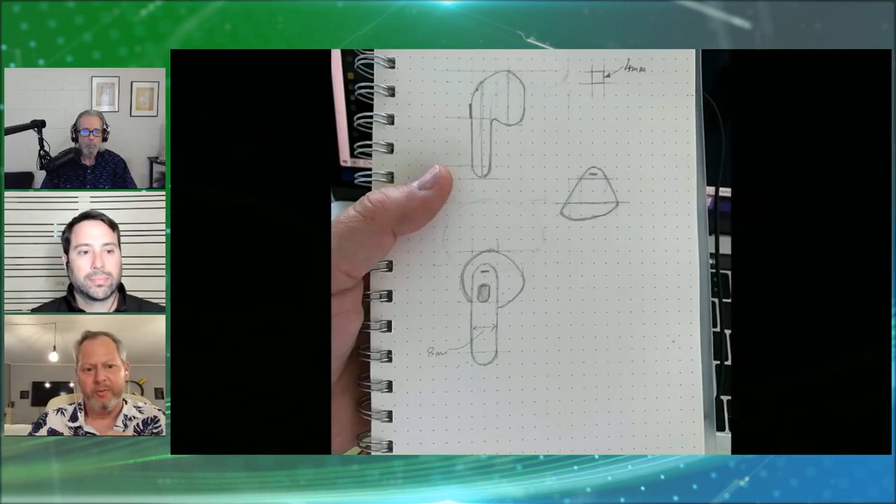So Stephanos, let's go ahead and take a look at the video. I understand you're going to describe the process for us here. Right. So this is a simple example that starts completely from scratch. I thought, well, how about designing a set of wireless earbuds? I designed them on paper with pencil, and then I brought these sketches into Onshape. And then we launched Phi, which, as you see, is in a tab within Onshape.

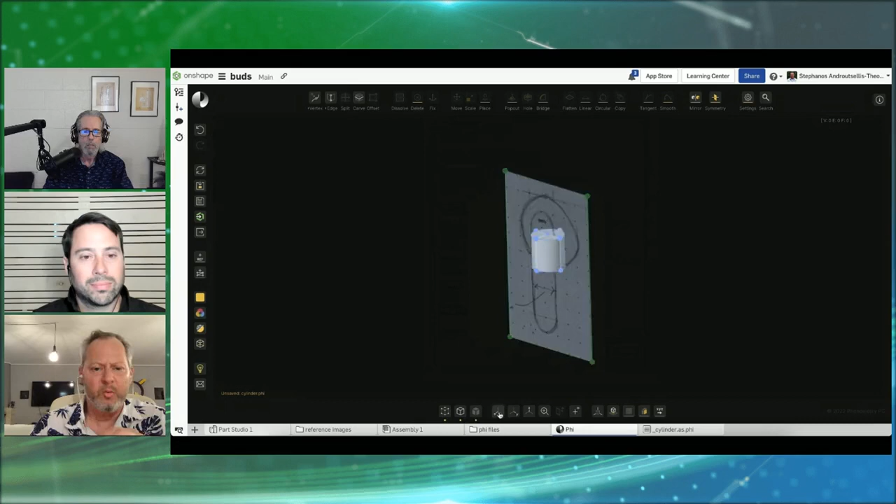And I started with a simple cylinder, which would be part of the stem, the main body of these earbuds. And then I load all these reference sketches. You can load as many as you want, and then position them, rotate them, do anything you want with them. And I shift my cylinder in place, roughly where I would like to start designing. By the way, I'm not a designer by profession, so this is just a quick example.

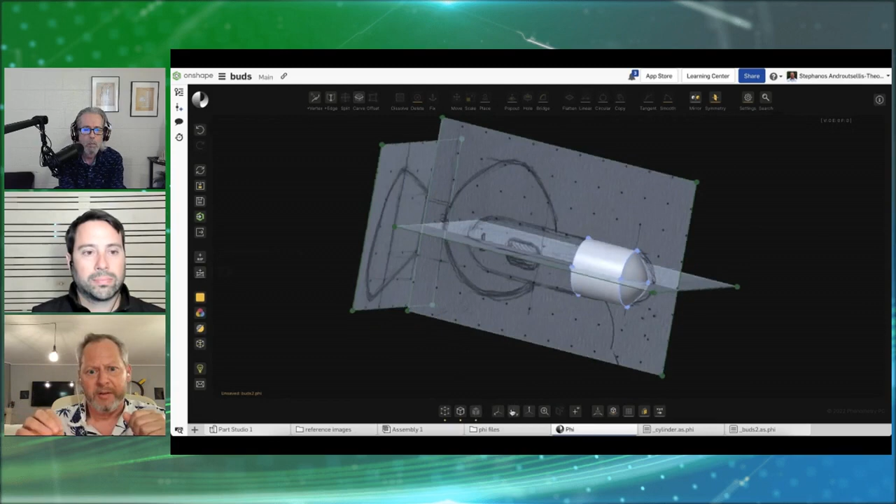And then I think, okay, how about starting from the lower part? So first I squeeze this cylinder because I see that it's not actually a cylindrical shape that I'm after. It's more like an oval section, as you can see there. And then I simply pull out this vertex to give it this rounded shape at the bottom. I pull it a little further out. It's very push and pull kind of thing.

And then I use a tool that we call Smooth, where you create edges, chains of edges, you select them, and then you ask the system to smoothen everything together to give it a fair and rounded shape.

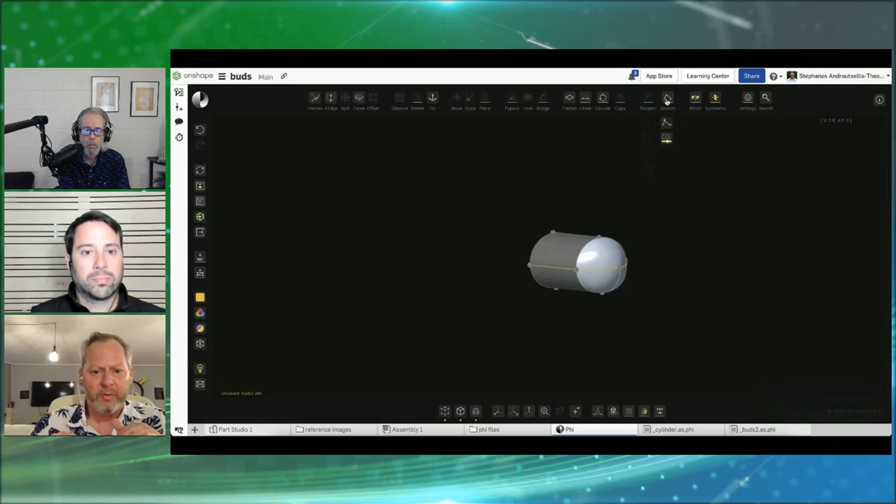And usually with just a couple of clicks, you can get to the shape you're after, but you can also go in and do more elaborate or precise work. And then I move a little further up.

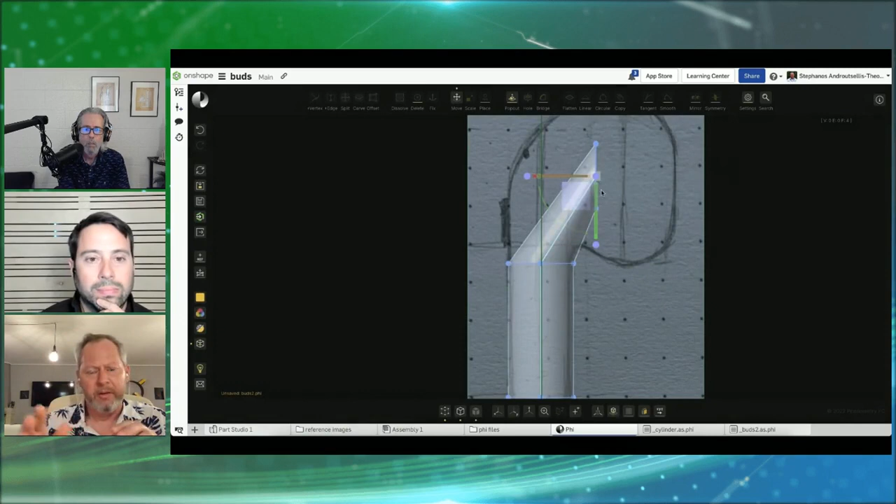I will simply elongate the cylinder all the way to the top, and then I do a pop out, which is kind of an extrude. So I create another little slice, which I can then move around, rotate. Here I use a precise rotation tool, and I place it roughly on that line.

I stretch it to give it the dimensions that I'm after. And then I rotate on the other view, and I also deform it like that. As you see, the surfaces organically constantly deform to accommodate the shapes that I try to give.

Here, I'm just flipping around this reference sketch. I brought it in the wrong orientation, but I thought that I could just show how you can place it again. And then I continue the design work.

So I select this front face, I pull it further down, and then from the front side, I will again select and pop out, do a little extrude of this face, as you saw there.

And then again, I will use this smoothening tool. So I will select all these triplets of edges, these small chains, as you see. And with just one click, I will ask Phi to deform and smoothen everything together.

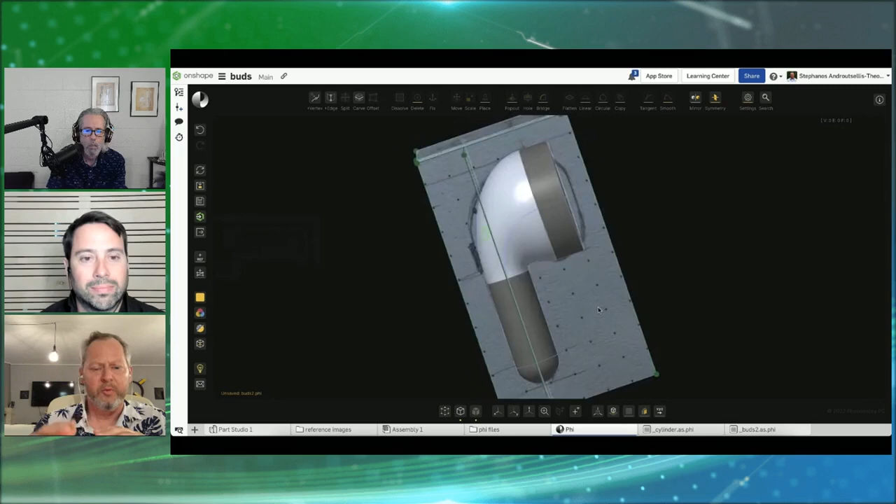So you see, immediately it gives me a shape that is quite close to what I'm after, because it's the most fair and smoothened shape that corresponds to these geometries.

Then from the front, I realize that I have a circular shape, which is not what I'm after. So simply by pulling out this little edge on one side, it all deforms to give me a shape that's closer to my design. I see a slight dip there because Phi now thinks that this is what I'm interested in, but just by adding a straight line, I can get rid of it.

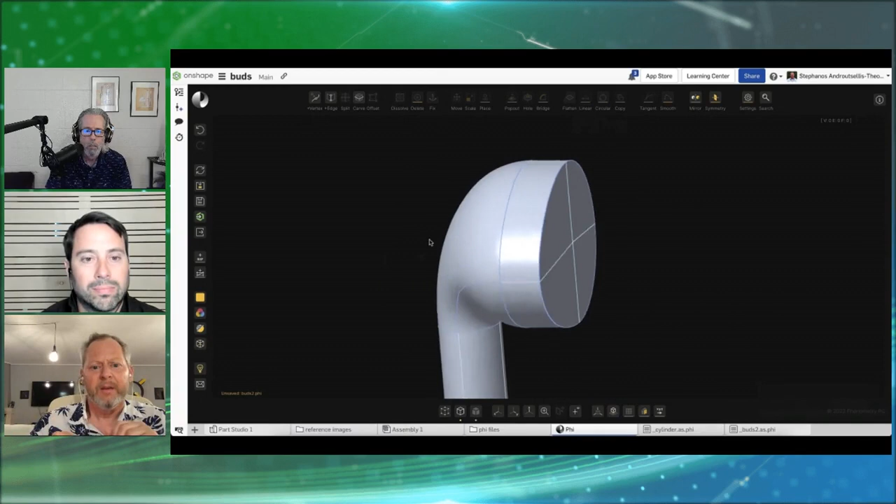And anyway, this will be fixed in a moment, as you will see. So at this point, we already have a shape that is pretty close to what we are after.

I go in the rear side and I simply pull out this edge and the surface is deformed to take that shape. And then I will finish off the front side by simply squeezing in the front side of this earbud. And then from the top view, I do a little more editing.

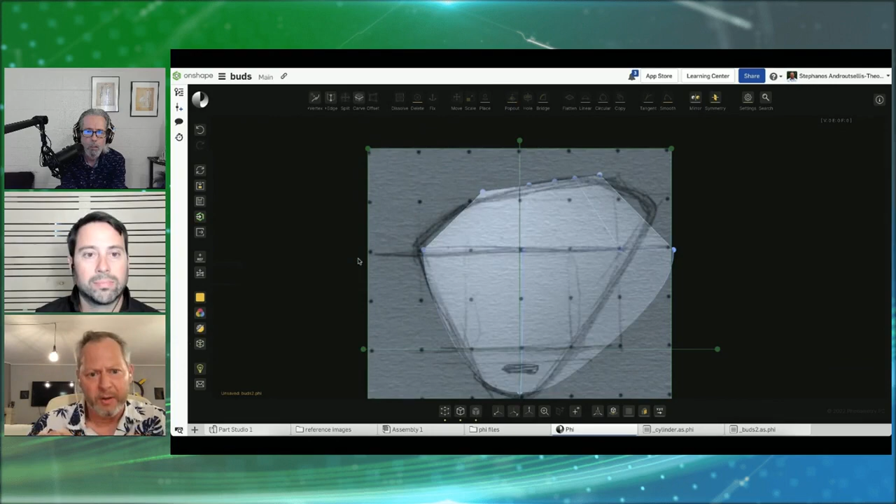So I'll push it back and I will tilt it and put it there in place roughly. Okay, we're not going for perfection here. This is just to give you an idea of how you can work with this tool pretty fast.

And then once more, the smoothen tool, I select these edges and I simply hit smoothen. But before that, I also set the smoothen strength. So this strength will allow me to get a more, let's say, strong result, a more rounded shape.

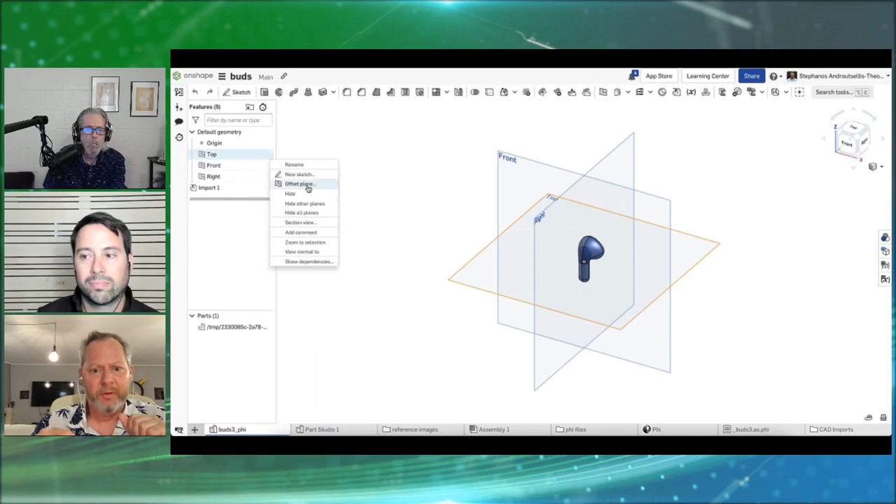And now simply with a click, I'm sending this over to Onshape, and there it is, translated into a Part Studio. So now all of the Onshape power is in my fingertips. I can add a fillet, as we were discussing earlier, and there it is.

And so if I decide that I want to do some further edits, like here I'm doing sort of an offset, and then I push in this surface to create a hole, roughly where the music will be coming out from, as you see there. So I do this little edit, and then I click send to Onshape once again, there on the left.

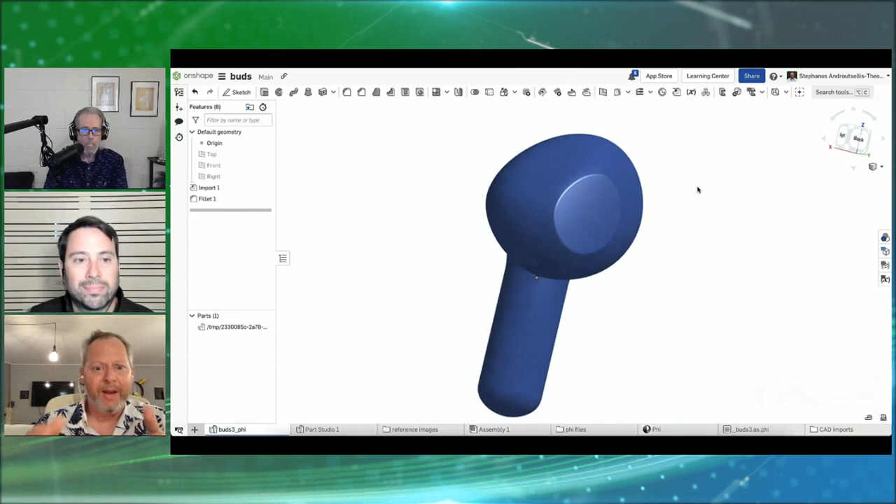And back in Onshape, after a few seconds, you will see a live update. So there you go. The shape has changed, but the fillet is still in place. So all of these downstream features are preserved, as we were discussing.

And now, simply using all of the Onshape capabilities, I do a mirror, then I do a shelling of these shapes, and with a section view, I can observe the surfaces from the outside, from the inside, until I'm happy that it's the result that I'm after.

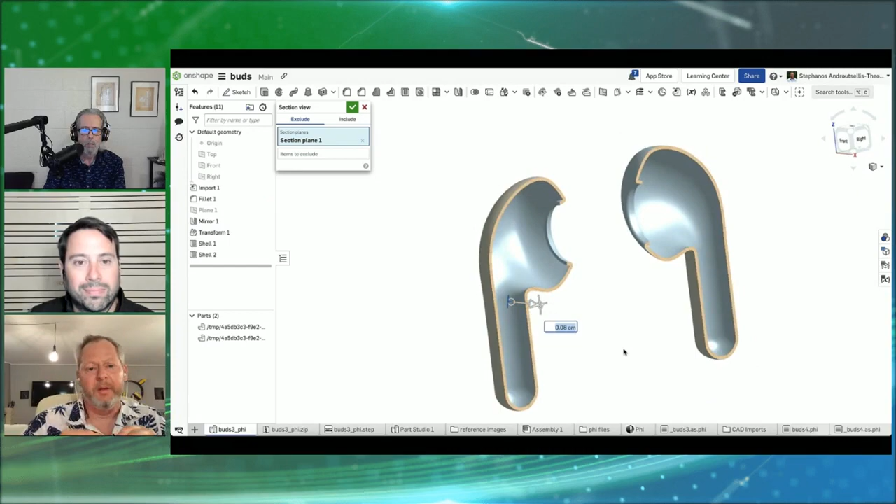And actually, we have a consultant who's a very experienced designer, and we asked him to have a go at further working on these earphones to get to a final product.

Yeah, so that's just to give you an idea of what it feels like to work with this tool. That's awesome.

That is really good stuff. Thank you. Fantastic demonstration. That was essentially real time, maybe sped up a little bit, but the fact that you could get all that done in whatever 5 minutes, 3 minutes that you used, that's incredible.

Yeah, we wanted to show that because often people, when they first have a look at Phi, they're a little unsure how to start. So I just wanted to go from zero all the way to the end.

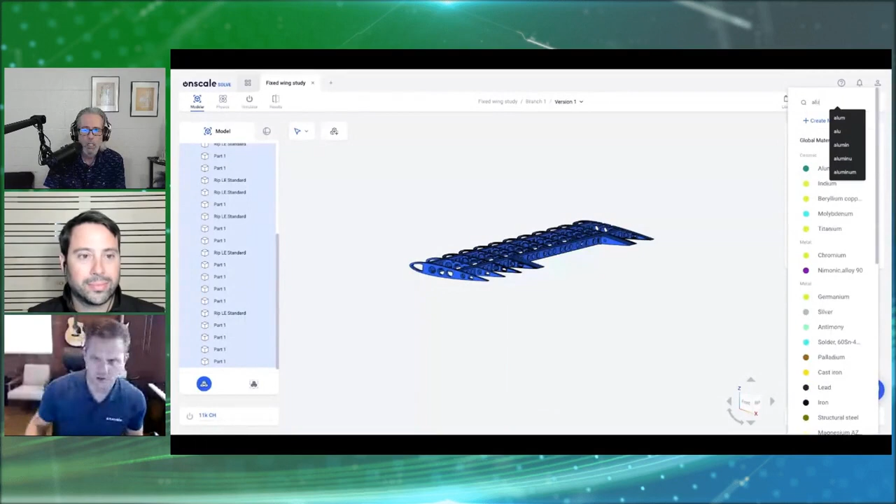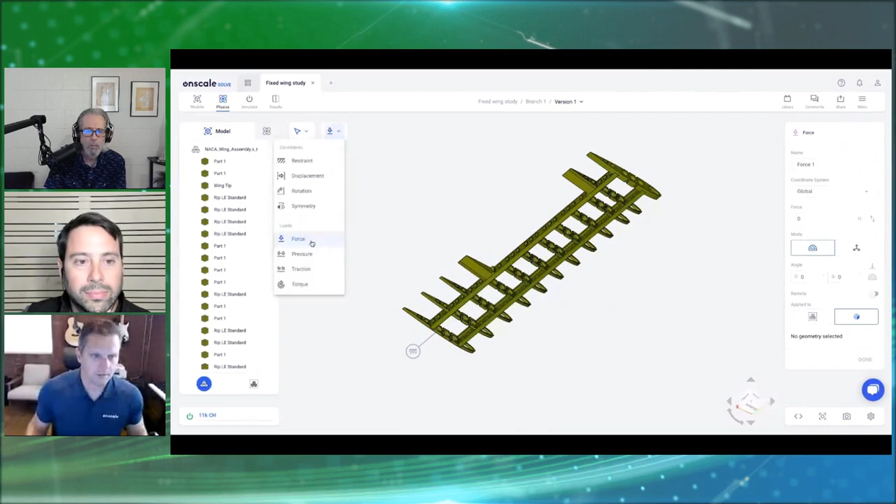First thing I'll show you is an aerospace application — I had to do that since I'm an aerospace engineer and now a pilot. This is a wing, you've got some ribs, some spars. You can see it's a pretty complex assembly with lots of different parts. We can easily set up simulation boundary conditions, like constraining one end of the wing, and put a pressure or force load on another part, 800 pascals. Some engineer probably figured out that was the wing loading for this particular wing.

And then we'll see what the simulation results in. By the way, we're generating a mesh here — this is all happening automatically. I didn't have to go in and put in a bunch of settings and tweak my mesh. That's always the hardest part about simulation, especially for younger engineers, figuring out the optimal mesh in terms of accuracy and runtime.

Now I'm going to show you how we can actually go into our scripting language. We took a cue from you guys — this is kind of like your FeatureScript, but we call it Sim API. I can put in a mathematical function here, so if I don't want a fixed value of pressure, I can make a pressure distribution that in this case is based on an elliptical distribution.

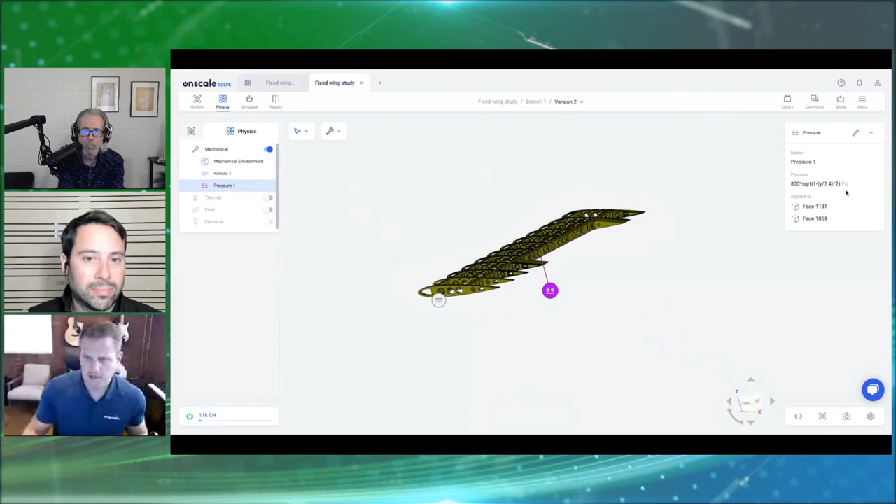We can run that simulation and look at the deformation. There you can see the mesh if you want to — it does a pretty good job of just meshing right out of the box without any tweaks, but if you want to tweak it, you can. You can get lots of engineering insights extremely quickly from that CAD assembly, which is created in Onshape.

Yeah, I can't imagine going through and trying to mesh that entire wing assembly. That would probably take a couple days, right, to get it all figured out properly. In some cases it'll be weeks. Yeah, I've heard that some companies actually employed analysts just to do the mesh for these things.

That's insane. Well, that's a great little introduction to OnScale, and thanks for— We got one more video. Oh yeah, we're not done. We're not done yet, Aaron. We've got another video we're going to show here.

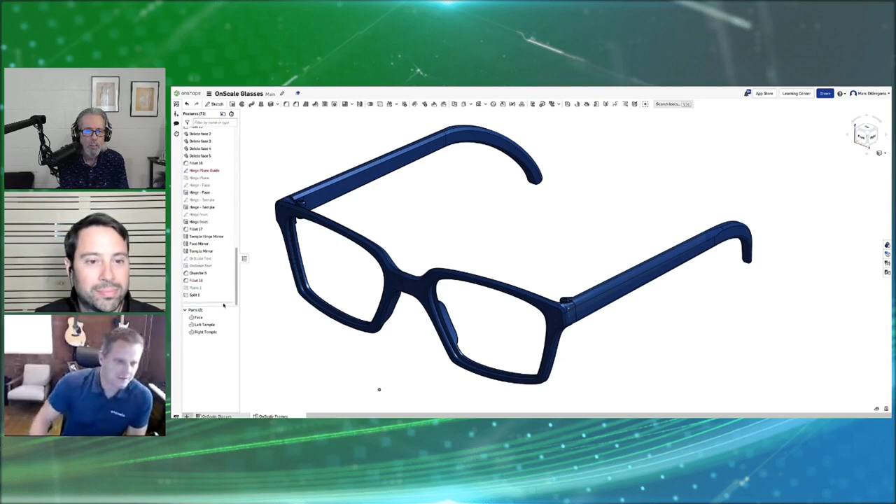So this is a pair of eyeglasses. You can see that this is an assembly with a couple of parts — fairly complex CAD model with lots of different features we've created. Most importantly, we'll show you how we've created the mates here. I'll go to the assembly view — I've already pulled in all my parts into the Onshape assembly and set up the mates and everything. We put some Revolute mates on the hinges, as you'd expect, so they actually work as you would expect real glasses to work.

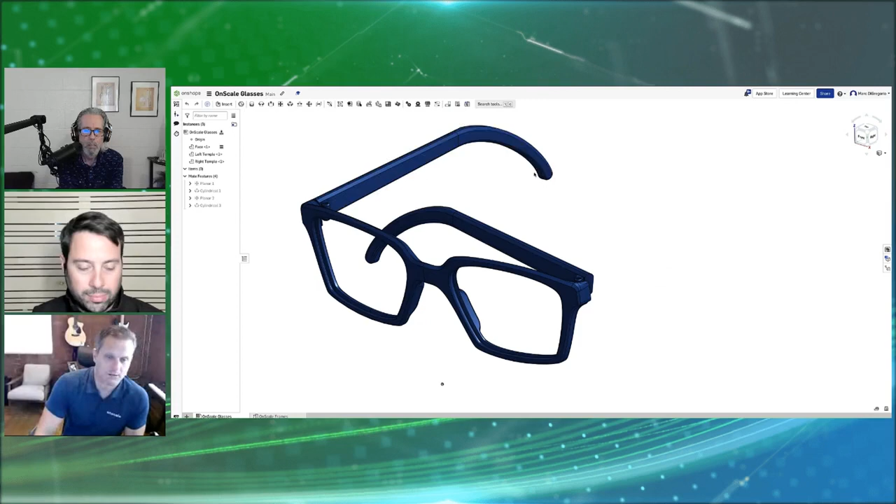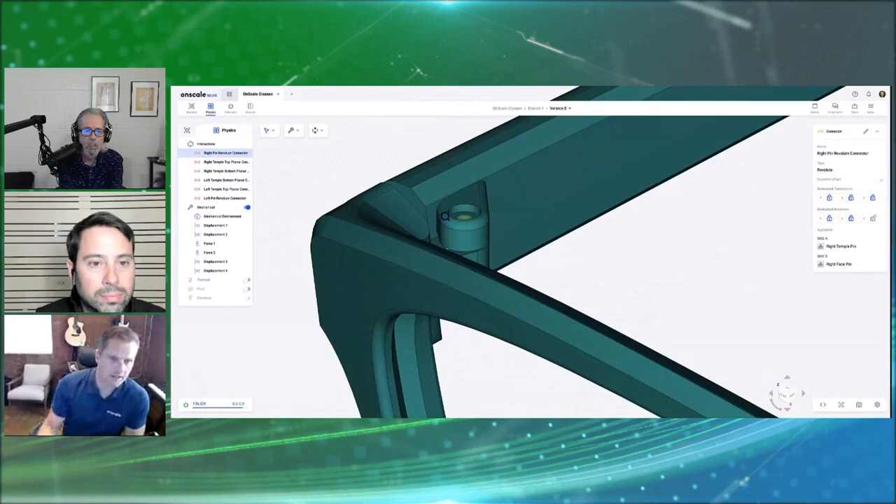We'll show that we import this into OnScale, and we'll actually detect those mates. Very soon we'll have the ability to automatically detect them; right now we can see them from the Onshape API. So I'm going to set them up in a manual fashion here, but we put in the same Revolute mates that you see in that Onshape model, and that'll mimic the physics.

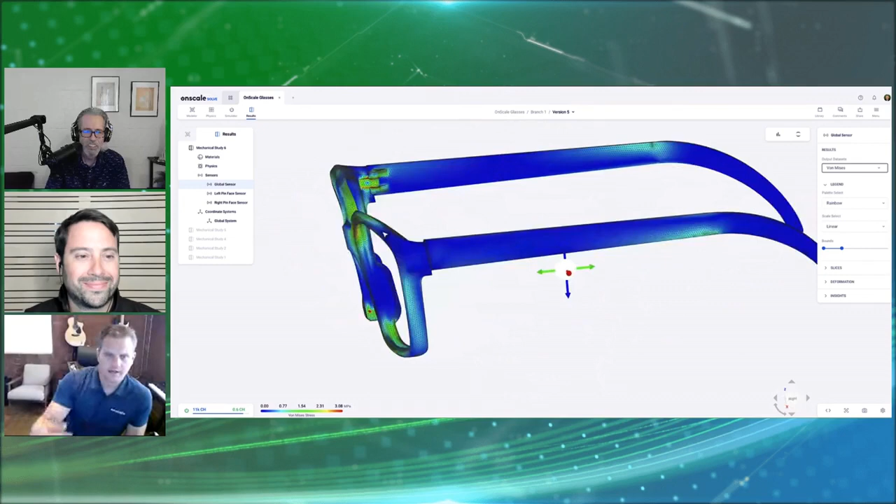Because really what you're interested in is how these non-bonded parts will move relative to each other, and what type of force they will impart on the structure to make sure that it's strong enough. You don't want your glasses to fail — everybody hates that. And here's what the resulting simulation looks like from that non-bonded, pretty complex Revolute mate scenario.

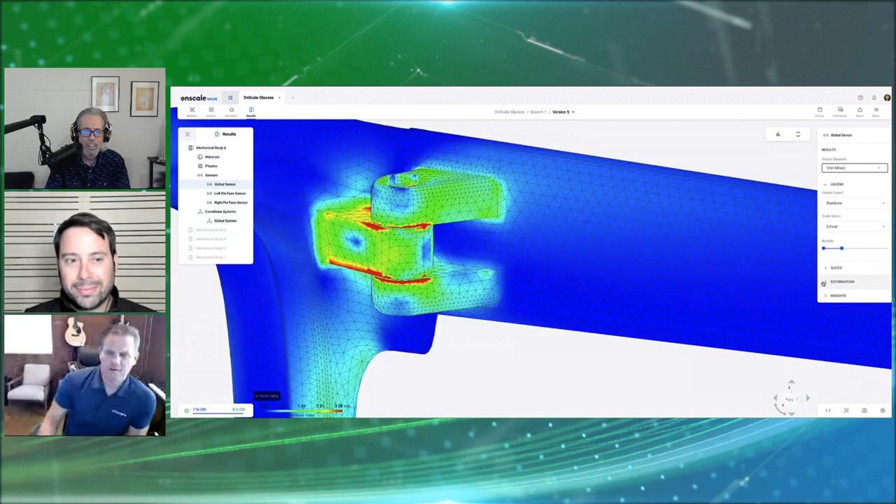That's fantastic. I haven't actually seen that yet, so I'm really thrilled to get a preview. Is this a preview, or is this released yet? This is coming very, very soon. They told me it'll be on the next sprint. I think by the time that this podcast goes live, it'll be available in the product. Yeah, so we're really excited to show you this.

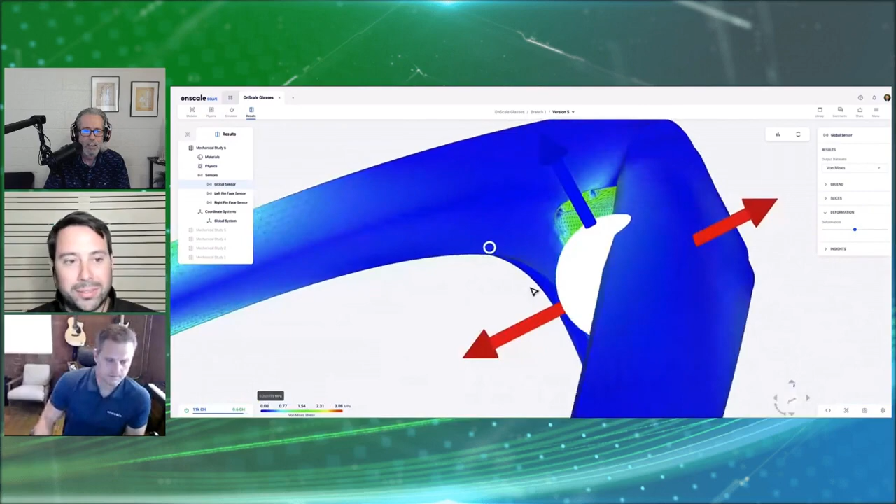And you can just see the deformation there as the thing is free to slide around. Just super cool. Fantastic. That's going to help setup happen that much faster. Yep. Kudos to the OnScale team. That's fantastic. Thanks. Thought you'd like that. Yeah, I like that a lot too.